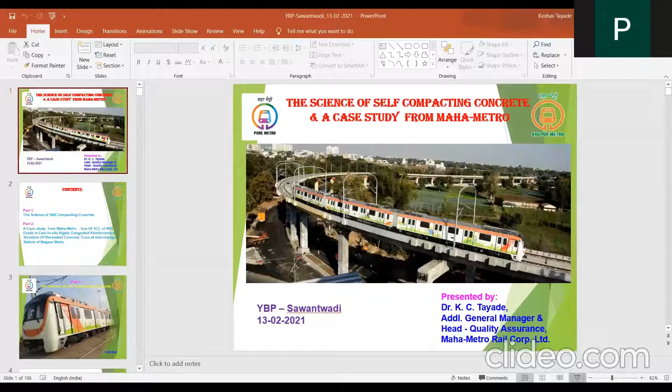I would be presenting before you a topic called self-compacting concrete. Many of you must be knowing it, many of you might have worked with it, but I would be sharing my experience. We have done self-compacting concrete when I was in the Water Resources Department on 3 dams, and then I have done it in Maharashtra Metro Rail Corporation on an interchange station in one of the concrete trusses there. So I would be sharing the screen now, and this is my presentation on the science of self-compacting concrete and a case study from Maharashtra Metro.

There are 2 parts. The complete presentation of 106 slides is divided into 2 parts: the science of self-compacting concrete, and part 2 is a case study from Mahametro on the use of self-compacting concrete of M60 grade. This is also a high grade concrete used in a cast-in-situ, highly congested reinforcement structure of a Vierendeel concrete truss at the interchange station of Nagpur Metro called Sitabuldi station, where there is an interchange of 2 lines. The southwest corridor and the east-west and north-south corridor meet here at this interchange station.

So this is the science. This is the metro train of Nagpur Metro. We'll start with a little introduction.

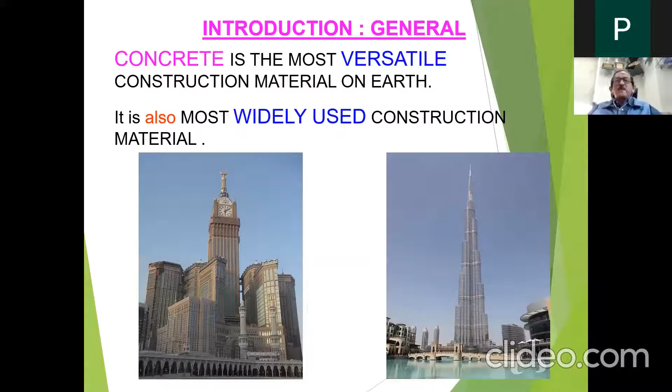As you all know, concrete is the most versatile construction material available on earth, and also the most widely used. However, even though it is widely used, it is least understood. Why? Because we are converting a heterogeneous material into a homogeneous mass, which we require with consistent and homogeneous properties. So we call concrete a panacea for all problems in construction. Whenever concrete is to be done, it has to be done properly, such that the strength and durability criteria are met.

Some beautiful structures of concrete, because we are talking about concrete, and that too self-compacting concrete, which can be cast in many shapes and sizes, almost any shape that can be thought of by the architect. Let us see some structures wherein the shapes would be very important. These are some shapes which are intricate and would require a very high level of precision in working and construction.

Now, a small line from Aspdin. These are the specifications, or we will say the charter by the royal king. He got a patent for cement in 1824, and in it he called it an artificial stone - what we now call cement.

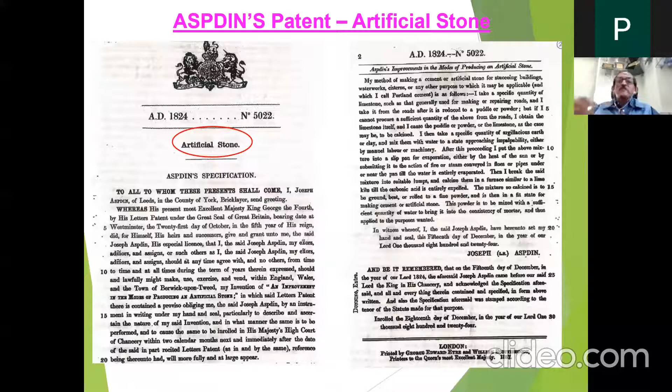Concrete has many definitions, and it is also defined as a flowing stone. That was artificial stone. When we talk about self-compacting concrete, it is a flowing stone, and SCC resembles this in the best way - it is a stone which is flowing, and after some time, when it sets and hardens, it becomes as hard as a stone, or much stronger than many stones.

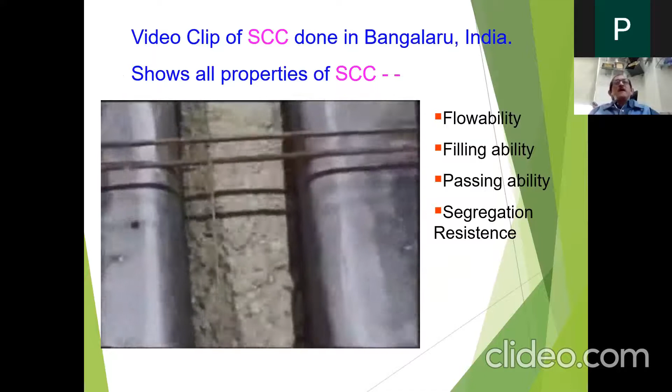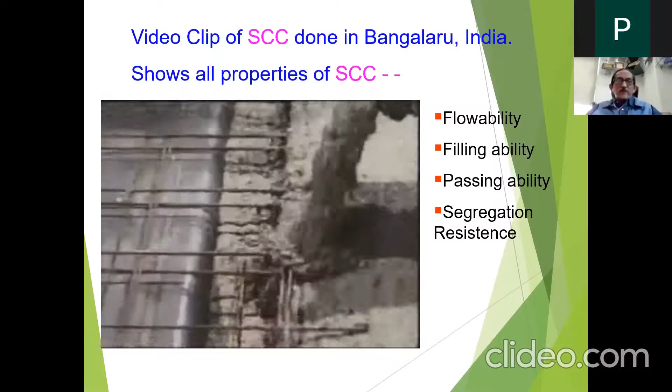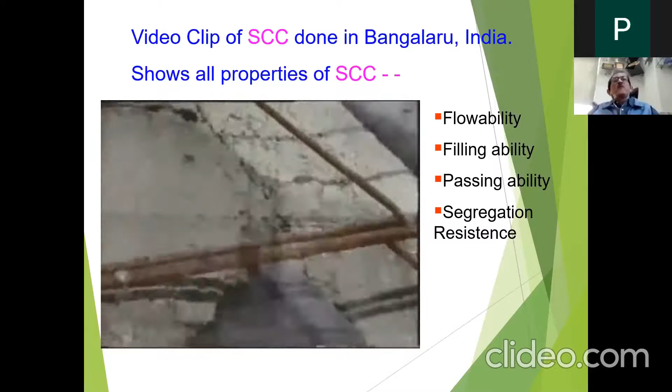This video clip is a very classical case of self-compacting concrete done many years ago in Bangalore, and many such videos are available. I am showing this to highlight the 4 properties required by self-compacting concrete: flowability, filling ability, passing ability, and segregation resistance. Flowability is how the concrete flows without segregation. Filling ability is how the concrete fills the formwork completely. Passing ability is how it passes through reinforcement - even when not very congested, you want concrete that can flow through congested reinforcement - and of course without segregation, meaning it should have segregation resistance.

Am I audible properly? Somebody answer? Yes sir, yes. Okay, no problem. Otherwise after 50 slides people would say it was not properly audible - that should not happen.

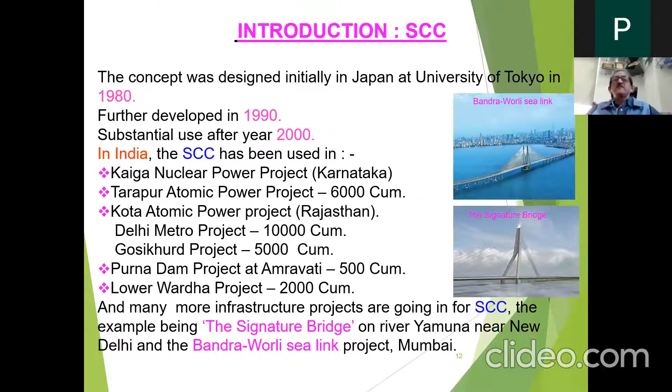In the Indian scenario, a few projects have used SCC in recent years: bridges, atomic power plants, dams, metros, and monorails. The adaptability or shift to self-compacting concrete is still limited, because people think doing SCC is a very intricate job.

It's not like that. Once the concrete is properly designed by a concrete technologist, what the site people need is only a very properly designed formwork. If the formwork is proper without any leakages, and the mix designed by a concrete technologist is proper, then SCC would be the best option. I would also say that self-compacting concrete is the future of concrete. Fiber reinforced concrete and self-compacting concrete would be, or should be, the future of concrete, because of the many advantages of self-compacting concrete.

Self-compacting concrete has been defined by very many sources, and if you go to a website you would find numerous definitions. But the three most important, or most suited to us, are the EFNARC specification, what is defined by Khayat, and what is defined by the Japan Concrete Institute. There is also the Korean Concrete Institute. So what is SCC as defined by EFNARC?

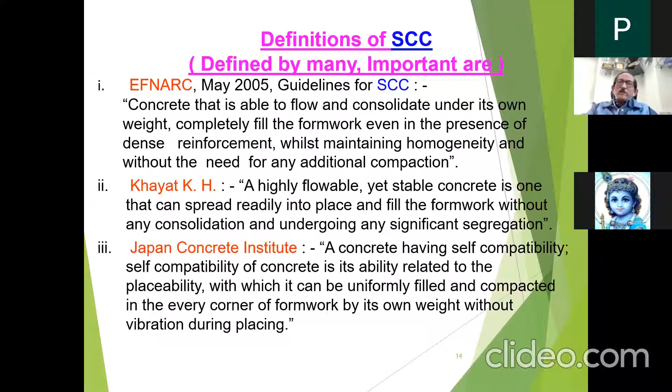The Japan Concrete Institute defines a concrete having self-compactability as the ability related to placeability with which it can be uniformly filled and compacted in every corner of the formwork by its own weight, without vibration during placing. This definition is also very apt in explaining the various properties of self-compacting concrete.

So self-compacting concrete, in short, is a highly workable concrete with slump in the range of 650 to 800, which can flow through densely reinforced and complex structural elements, as you will see in the lecture ahead. It has enough cohesion to adequately fill all the voids without segregation, without bleeding, without separation of material, and without the need for vibration or any mechanical consolidation or outside energy. It is useful wherever placement is difficult, such as heavily reinforced members or complicated formworks, and where vibration is difficult.

So this would be the best option. After going through this lecture, you may also try or take up projects in self-compacting concrete, and I would always be glad to be associated with them and tell you the minor things about it, and where people normally would go wrong or find difficulty. The honorable professors and lecturers listening to this lecture can always take up small projects in self-compacting concrete. What you need is only, first, the will and the attitude, and secondly, the 3-4 instruments for checking, which can be easily fabricated in your workshops.

So SCC is considered a preferred option due to its well-known properties of flowability, passability, and compactability. We will again and again talk on these properties, because they should never be sacrificed when designing self-compacting concrete. Many people would say their concrete is self-compacting only because it has a slump of 300 or 400. I would say that is not self-compacting concrete, it is a rheodynamic concrete or a very high flow concrete, wherein there would be a possibility of segregation and compactability problems, because it is not designed as self-compacting concrete.

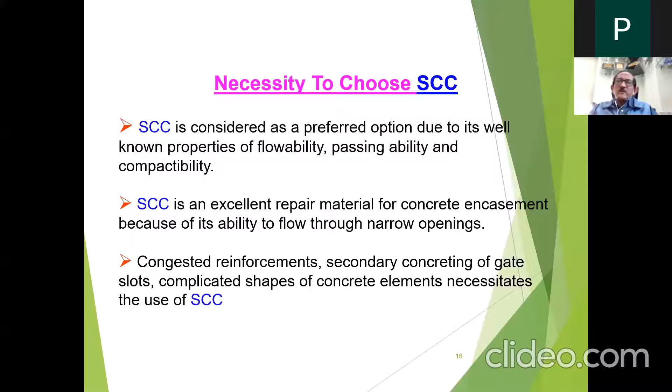SCC is an excellent repair material for congested reinforcement, secondary concreting of gate slots, complicated shapes, and everywhere a man or an engineer can think of. These are situations where self-compacting concrete is preferred, flowing through narrow openings and through secondary concreting of gate slots.

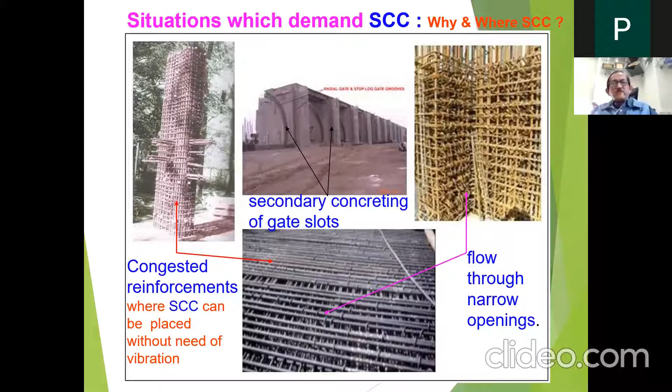The second photograph is from the Lower Wardha project, wherein the gate slots, the curved radial gate slots you are seeing, are secondary concreting filled with self-compacting concrete. The bottom photograph is one of the rafts in metro projects, wherein there is heavy congestion and we need to go for self-compacting concrete.

These are some examples. This is a pier of a flyover. The second photograph is a pier of one of the metro piers in Nagpur, and the same type of piers are there in Pune also. This shows congestion, and this is the Mumbai Metro monorail project, wherein they have gone in for complete self-compacting concrete for the piers also.

These are the radial gates and the gate slots where concreting was done, and the concreting needs to be done when the gates are in position. It becomes very difficult because from one side there would be formwork, and on the inside there would be inserts to hold the gates and the plate for gate sliding. So it's a very congested place wherein self-compacting concrete would be a better option.

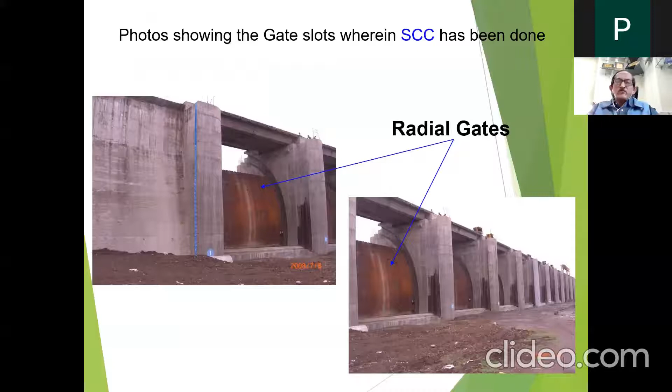This is the Gosikhurd project, one of the biggest projects of national importance. This is the Lower Wardha project, wherein all the gate slots have been concreted with self-compacting concrete.

There are many advantages, some of which I have enumerated here. It can completely fill the formwork, can be placed and compacted by its self-weight without any vibration efforts, and offers a rapid rate of concrete placement. This is another big advantage, because normal vibrated concrete that would take 8 hours to place, the same concrete with self-compacting can be put in place in just 2 hours.

So there would be 75% time savings. In just 25% of the time, we can place self-compacting concrete. There's also reduction of number of joints, and use of fly ash on a very big scale because you require high paste content, so fly ash use is mandatory. If you are not getting fly ash, you can go for slag, but fly ash is a better option because it is eco-friendly also.

Then SCC enables reduction in noise, because if you are residing near metro works, and when concreting goes on at night with vibrators, it makes a lot of noise—this is a first-hand experience to many. Now imagine with no vibration, how quietly the concrete can be done.

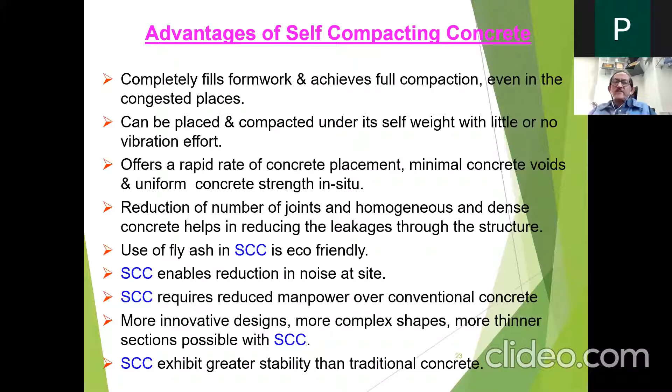When SCC is used, internal bleeding is reduced because you have a very good rheology of the concrete. The denser microstructure of the ITZ, the interfacial transition zone, in SCC may contribute to lower plastic settlement, higher bond between steel and concrete matrix, lower permeability to oxygen, and lower chloride diffusion coefficient.

So even with the oxygen permeability test, which is coming in IS 456 as an amendment, you will find that SCC has lower oxygen permeability. In RCPT also, or chloride migration as per Nordtest 492, it would show better results.

Then SCC allows rapid pumping, as I have told you, and has improved aesthetics of the final product. Whatever SCC I have done, I have observed that the finishes of self-compacting concrete, due to the presence of fly ash, become so smooth that it resembles a concrete like marble.

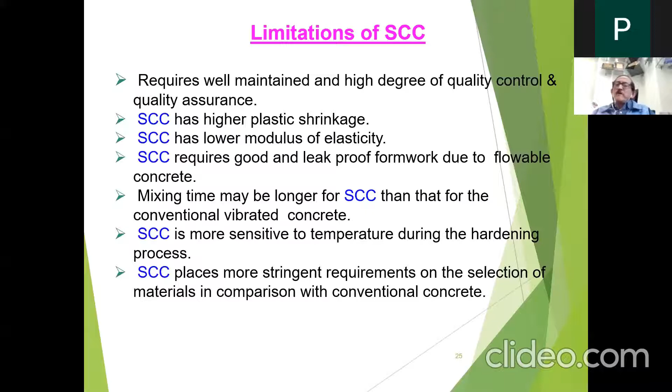To understand self-compacting concrete, it is very essential that the rheology be understood, because you are playing with the rheology of concrete. You are making use of the rheology of concrete, and this complete science of rheology, in preparation of self-compacting concrete.

Now, rheology may be defined as the science of the deformation and flow of material, and is concerned with the relationship between stress, strain, rate of strain, and time.

So all these things together, there is a relationship. The ratio of shear stress to shear rate is not constant for concrete. The shear stress initially required for shearing the concrete would be very less when the concrete is just prepared. But as time passes and the concrete starts to harden, the shear stress required would be more and more, and at one stage when it solidifies, it would be far greater. So this ratio is different.

For fresh concrete, the flow equation is expressed by Bingham's equation: tau equals tau0 plus mu into gamma. The rate of shear and the shear stress relationship is defined by the slope mu, and there is a fixed yield stress. The yield stress is fixed because when you take the slump, you see the concrete in a heap, and to displace it you require some initial force, that is the value of yield stress tau0, after which the concrete will go on flowing.

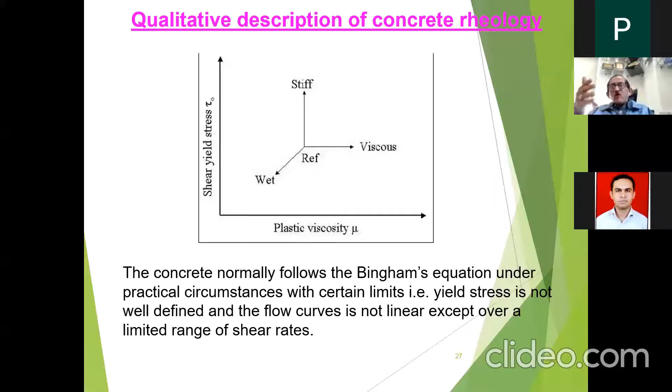This understanding has to be applied when preparing self-compacting concrete, because stiffness, wetness, and flowability will all be considered while designing it. The rheology of fresh concrete, like workability, includes parameters of stability. These three parameters are what we call SMC: stability, mobility, and compactability. I have written stability, compactability, and movability or flowability. All three parameters encompass six sub-parameters in turn.

The stability of the concrete depends on whether it has segregation resistance, whether bleeding is present or not. If bleeding is present, the concrete is not stable. Compactability depends on relative density and how easily it can be compacted into the formwork being used. Mobility depends on internal friction, cohesion, and viscosity.

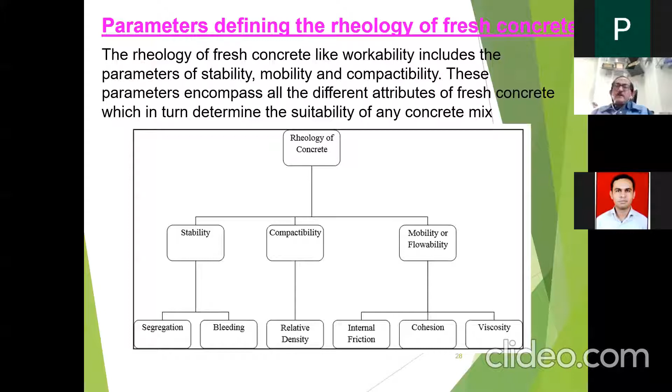All these parameters are played with when self-compacting concrete is designed, by addition of paste and by addition of viscosity modifying agents. We play with the internal friction, adding superplasticizer, or hyperplasticizer, so that internal friction is reduced. We use proper mix design and properly graded material, and control the water-powder ratio, so that bleeding and segregation are avoided. The mix should be cohesive but not too cohesive, otherwise it hampers workability, and it should be viscous enough so that it can be molded into shape.

Specifications would change as per the size and shape of the member and its intended use.

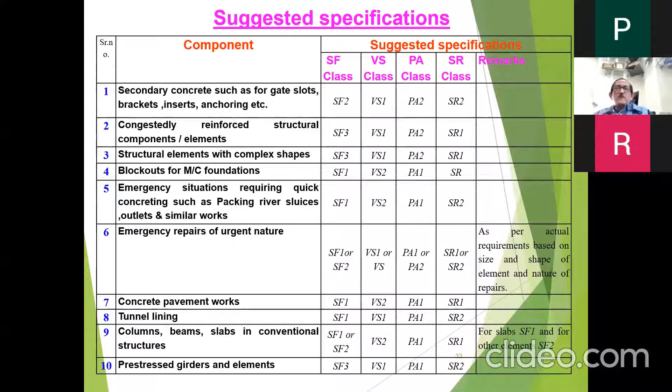This is the flow chart for the design of self-compacting concrete. You have to have flowability and stability, and these are covered and intermixed with limitation of coarse aggregate, usage of superplasticizer, reduction of water powder ratio, usage of viscosity modifying agent, and usage of higher powder ratio. This would in turn affect stability and flowability, which are intermingled. The parameters are intermingled, and they would affect the self-compacting concrete.

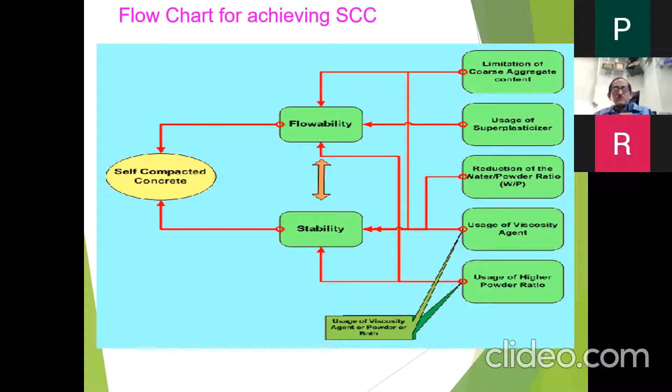So we need to design a self-compacting concrete which will be a trade-off, or a compromise, between flowability and stability. At the same time, we want mobility and compactability also. So all these things have to be taken together, and the design has to be done accordingly.

Materials for self-compacting concrete include lower coarse aggregate content, increased paste content, lower water powder ratio, increased use of superplasticizer or hyperplasticizer, meaning high range superplasticizer. So there would be mid PCs, high PCs, high range PCs, and addition of viscosity modifying agents.

Viscosity modifying agents are admixtures that modify the cohesion. They affect the rheological properties, modifying the rheology. They are used to reduce segregation, to reduce washout in underwater concrete, reduce friction and pressure in pumped concrete, compensate for poor aggregate grading—especially a lack of fines in the sand—reduce powder content in self-compacting concrete, reduce bleeding, and improve green strength in semi-dry concrete. All these give viscosity modifying agents their place in self-compacting concrete.

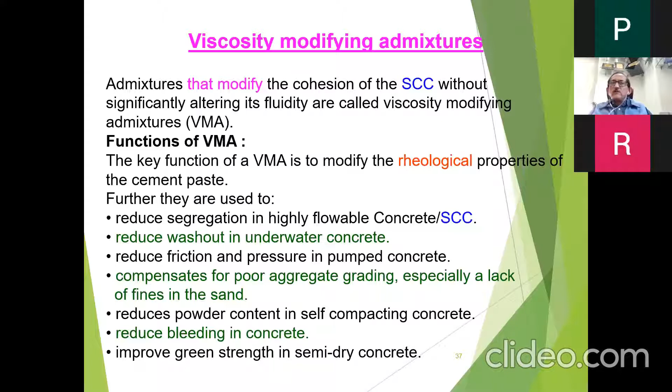Even though people say we can design self-compacting concrete without VMA, from my experience and reading, it would always be good to go for self-compacting concrete that uses both powder and viscosity modifying admixtures. For research work, you can design an SCC using only powder without VMA. But when the concrete mix is going to be used on field, for a public building or structure where thousands of people would use it, it is always better to use both viscosity modifying agents and powder to design the self-compacting concrete.

There are many approaches to mix proportioning. In the first category, the basic steps are determining the quantity of coarse aggregate and then deriving the approximate quality of mortar. In the second category, it's reversed: you first design a suitable mortar and then add the quantity of coarse aggregate.

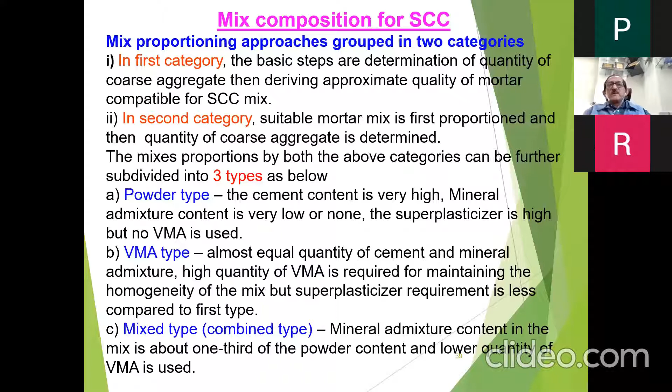Mixes are designed in three types. One is the powder type, where only powder content is high—powder meaning not only cement but mineral admixtures taken together. Then the VMA type, where only VMA is used but powder is not. And the mixed type, the combined type, where mineral admixture content is about one-third of the powder, with a lower quantity of VMA also used. This combined type, using both VMA and powder, would be the best type of self-compacting concrete for field use.

The basic mix proportioning methods fall into 4 categories: empirical methods, rheology-based methods, particle packing models—of which there are two, the discrete model and the continuous model—and statistical methods.

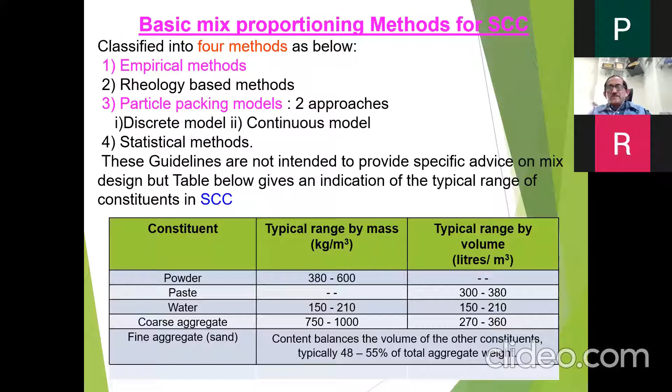These guidelines are not intended to provide specific advice, but the table below gives an indication of the typical range of constituents. When you start, EFNARC gives us a table showing what the powder range should be, how much paste or volume there should be, how much water should be, and so on.

A word of caution: SCC is less tolerant to changes in constituent characteristics compared to normal concrete. So whatever constituents we use for mix design must be the same on site. It's not acceptable to have different components during design and then have different components during production at the batching plant, because any change in constituent components changes the characteristics, and SCC is less tolerant to such changes.

Whenever I say less or more tolerant, it's always with respect to normal vibrated concrete. So all aspects of production and placing must be carefully supervised. Production of self-compacting concrete should be carried out in plants where equipment, operation, and materials are suitably controlled under a quality assurance scheme.

The formwork needs special attention. Formwork design, support, and fixing systems should assume that full hydrostatic pressure is applied to the formwork. Since the density of green concrete is approximately 2.4 to 2.5 times that of water, we have to account for 2.5 times the hydrostatic pressure that would be applied by water alone.

Experience shows that SCC does not forgive any shortcuts. If you take any shortcuts or make assumptions, you will not be forgiven and you will have to pay for your mistakes. So this is a word of caution before we proceed to transportation and placement of self-compacting concrete.

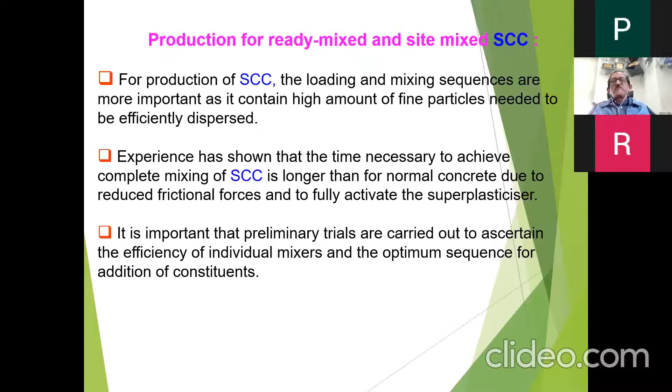After production, the concrete has to be assessed for Visual Stability Index, VSI. A value of 0 indicates the concrete is highly stable. A value of 1 means stable with slight bleeding at the edges. A value of 2 means unstable with bleeding.

Transportation and delivery can be done either by truck, truck agitator, or transit mixer. The main advantage is increased speed of placing. But this advantage must be managed carefully, because we need the formwork ready beforehand, and we need people available to manage the concrete arriving at greater speed, which the pump then places into the site.

It is essential that the production capacity of the plant, journey time, and placing capacity at site are all well balanced, and that is where planning comes into the picture. You have to plan beforehand, and you have to plan in detail.

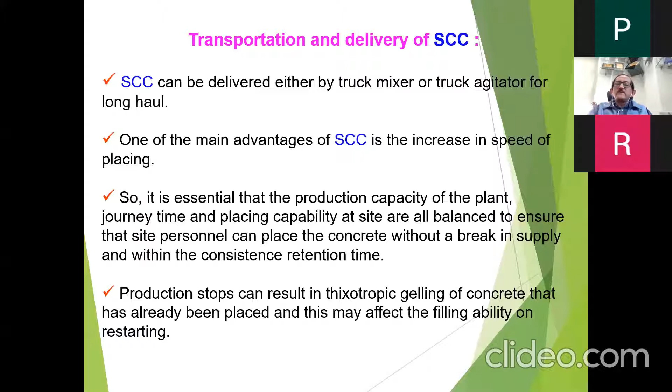The site requirements prior to delivery shall include that the site can place the concrete at agreed delivery rates, that acceptance procedures are agreed, personnel are trained, and formwork is leak proof.

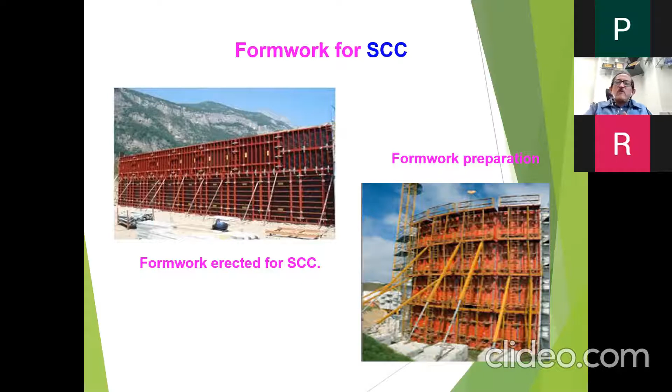So leakage proof formwork has to be prepared. The formwork pressure, I already told you about the formwork design, and these are some of the formworks erected, a very high level of formwork. In Metro also we go in for very good formwork. You might have seen in Pune or Nagpur, or in Bombay also, for that matter. Any metro would have very good formwork for piers and pier caps. The same type of heavy, leak-proof formwork we have to prepare.

This is a formwork where we can pump the concrete bottom up. So this is another advantage. Normally the concrete would have to be placed from top down by putting the chute or the pump delivery pipeline inside the concrete, or the hose pipe, which has to be pulled up as the concrete gets filled up. But here, because you are filling a liquid in the container, you can fill it from the bottom. But when putting it from the bottom and it rises up the formwork, you have to consider the pumping pressures also.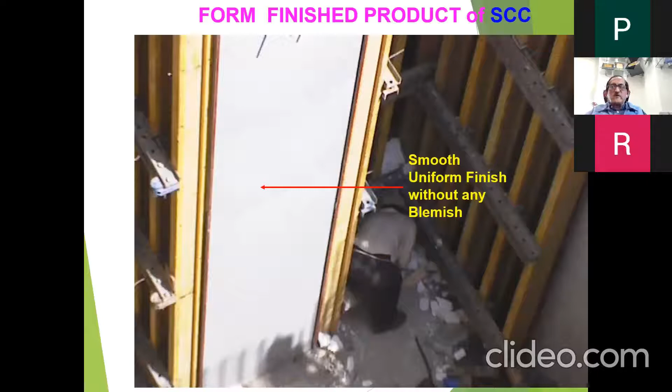This is a photograph showing a smooth finish, as I told you, without any blemishes. And this is the Gosikhurd project photograph, wherein you can see it's a very high glossy finish, a very good finish.

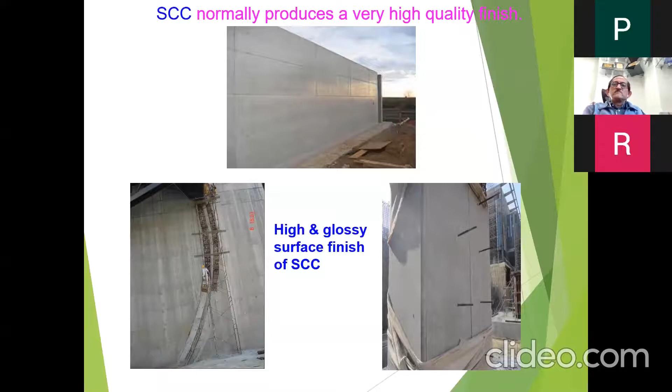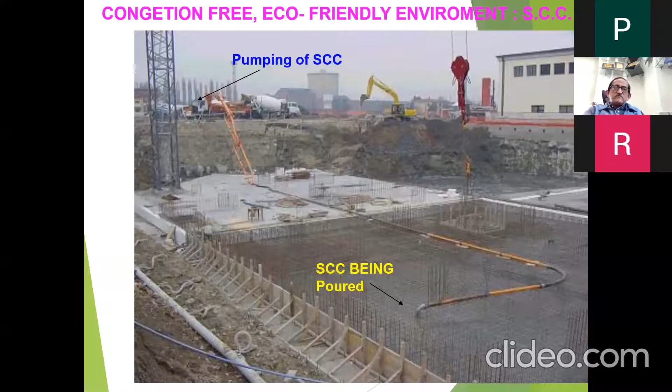Pumping is the most common suitable method. You can see this is self-compacting concrete, and you can see how watery it is, with a high slump.

There are 4 characteristics and many test methods. One is flowability or filling ability, using slump flow; then viscosity, measured by T500, V-funnel, or Orimet test methods; passing ability, measured by L-box, U-box, J-ring; and segregation resistance.

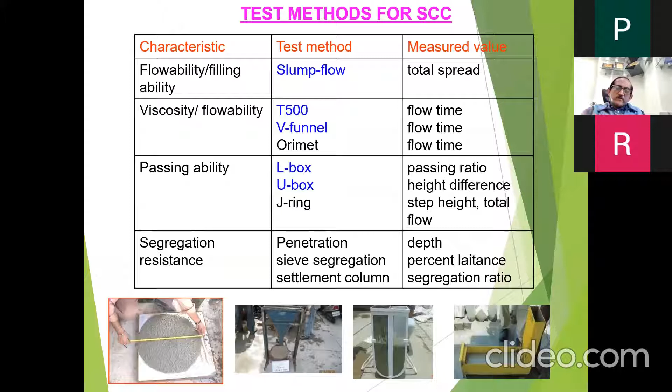We can look at some of the methods - this is the flow test method. An Abrams cone is placed, then lifted, and the slump is measured. The total flow and the flow at 500mm diameter are measured. The time which the flow requires to pass the 500mm diameter, called T500 or T50, is the time the concrete takes to cross that line, and the total flow is the final flow. The time required to spread can also be measured.

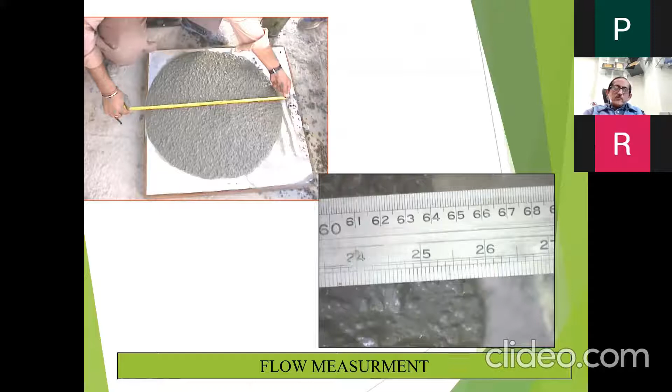So this is us measuring it, and this is the actual measurement. You can see the photograph here - it is 65, and normally 660. So the flow slump is 660 mm.

This is a small video I would be starting. Can you hear the music?

Yes, sir. Yeah. Yes, sir. Yeah.

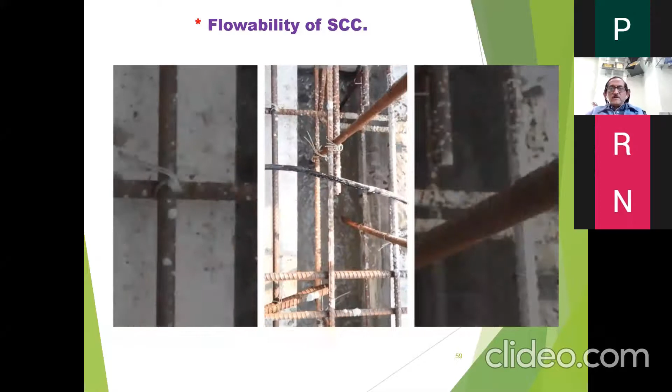Here you can see the concrete moving, how beautifully, without any compaction or external vibration efforts, it is moving.

This is the V funnel test, wherein there is a funnel. These equipments, as I told you, can be fabricated in your college workshops and used; the specifications and shapes are given everywhere. You have to fill this, then this hinged trap door is to be opened, and the time required for it to become completely drawn out is noted. So the time taken for the flow passing through the apparatus is measured.

In the L box, there is a trap door, and you have to fill this, and then the flow takes place here. If it is an ideal liquid, the height here and the height here would be the same. But when concrete is there, it should be between 0.8 to 1. So when you go towards 1, it will be a good flow, and H2 upon H1 is the ratio, the blocking ratio, they say.

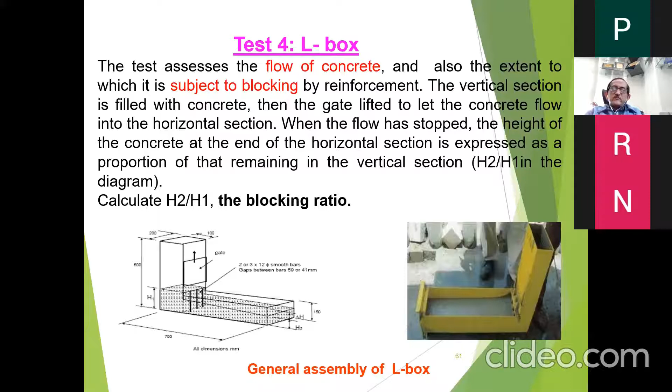Then this is the L box. You have to fill it from one side. Many of you must have worked on this, or might have seen it, but here I am just refreshing your knowledge that these are the things which need to be done, and these are the properties, the typical ranges.

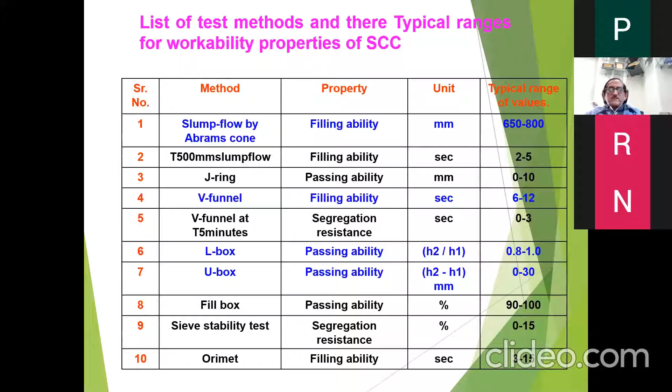The T500 should be 2 to 5 seconds. The V funnel should be 6 to 12 seconds, and L box should be 0.8 to 1, and U box should be 0 to 30 mm. So all these tests which have been shown are shown in blue color.

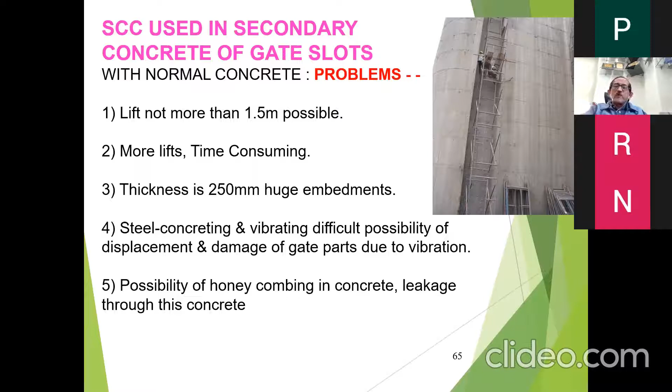Thickness is 250, huge embedments. This was the case in Gosikhurd and all the 3 dams where gate slot concreting, secondary concreting, was being done. Honeycombing and leakages through this concrete take place through this secondary concrete. So we went for self-compacting concrete, where lifts up to 6 to 9 meters were possible, with no vibration, no honeycombing, and a total SCC executed of 2000 m.

Details of SCC executed: 33 numbers of spillway and emergency gate slots of 2896 meters, with lifts of 6 to 9 meters. So if we had gone for 1.5 meter height, the number of lifts would have been more, and the time taken would have been more, because every time the lift has to be executed, the shuttering would be there. Here we can put a shutter of 6 to 9 meters at one go and then fill the concrete inside.

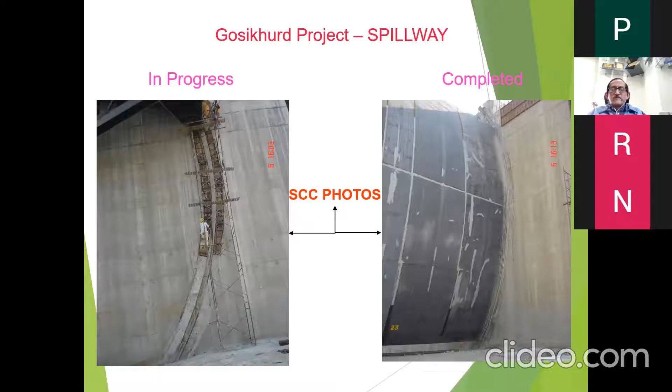This is the shutter. You can see this height. This is a very big gate of 70 feet height, and you can see that we are doing it in 1, 2, and there would be a remaining portion. So it was done at a great height, lifts of 6 meters.

Lower Wardha also, total blockout plan 31, and 1188 lifts would have been required for conventional concreting, which got reduced to 1/3 because we have gone for 4.5, 6 meter and more lift heights. So it has reduced drastically.

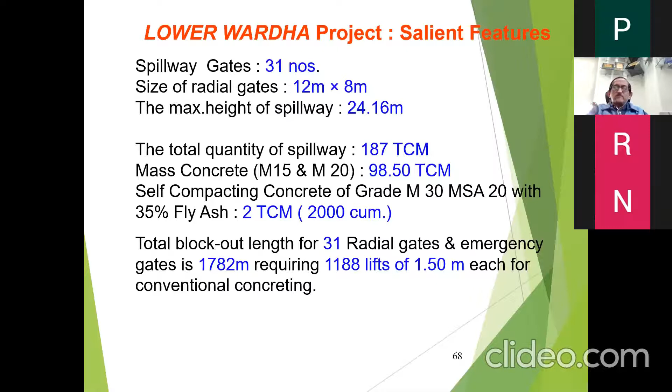This is one of the, as I told you, a handbook, WRD handbook, chapter number 3, self-compacting concrete. I was the author of this chapter. April 2019 it was released, however the chapter was long written in 2014-15. As per government procedures, it went through all the offices, there were comments, and it was given to many other WRDs of other departments and state governments, and their comments were also there. All were compiled and complied with, and then this chapter was taken out. This is available in the government press, in Bombay and in Nagpur also.

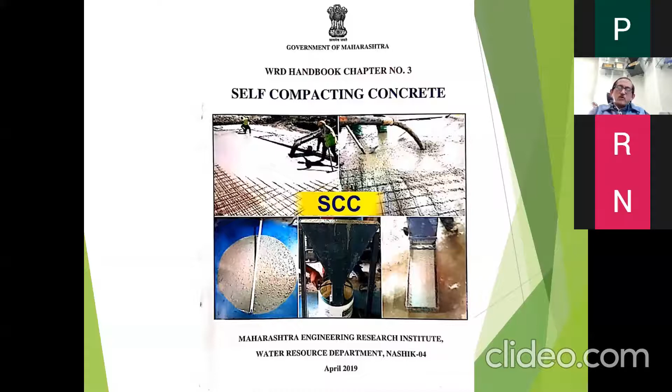Now we'll go to a case study of Mahametro, use of self-compacting concrete in cast in situ highly congested reinforcement. How much time do I have? You can continue, no problem.

This is the viaduct, and what is a Vierendeel truss? A Vierendeel truss, or rigid frame truss, was first introduced by Professor Arthur Vierendeel in Belgium at the beginning of the 20th century, so it is more than 125 years old. The Vierendeel truss is a structure where the members are not triangulated but form rectangular openings, and the members of the truss are joined rigidly together, with each member required to transmit bending, shear, and direct stresses.

The advantages of the Vierendeel truss are simplicity, simple detailing, less weight than a conventional truss, time saving, and resulting cheaper casting cost than a conventional truss. Due to heavy congested reinforcement steel in the structure, normal concrete pouring in formwork and layer-wise compaction using a needle vibrator was found practically difficult, so self-compacting concrete was designed and implemented.

Why we went in for self-compacting concrete was because of two problems we foresaw. One was the heavy congestion, which I used to say would require self-compacting concrete. And when the site people saw that the beams were 1.5 meters deep, it would be very difficult to compact the concrete when poured, because there are slender sections and deeper sections, so it would be difficult. So we shifted to this type of concreting.

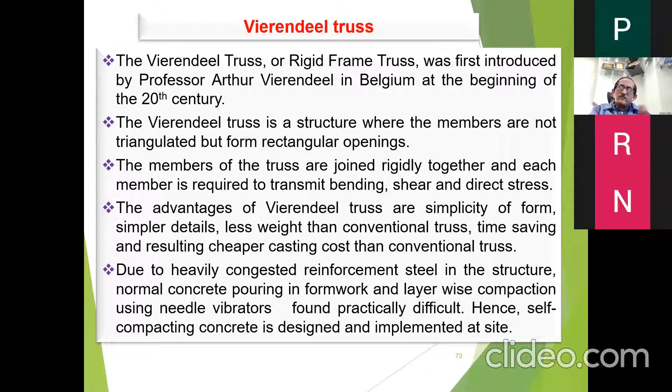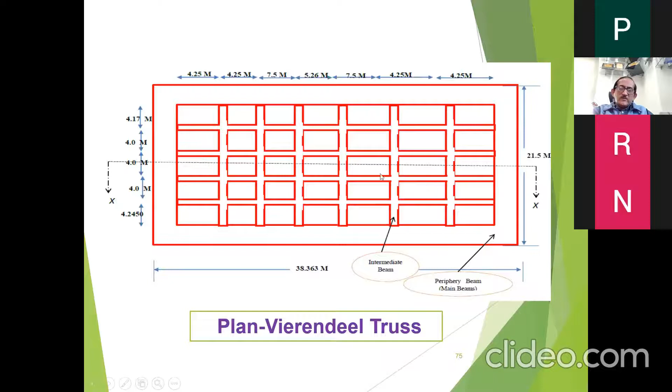The spans were 21.5 meters by 38 meters. So the Vierendeel truss had main beams of 38 meters, with 4 columns or piers, and the structure was supported by 4 main peripheral beams with intermediate beams. These are the peripheral beams, 1, 2, 3, 4 along the periphery, and these are the intermediate beams. The section was like this, with the pier going up, the main peripheral beam, and then beams in between.

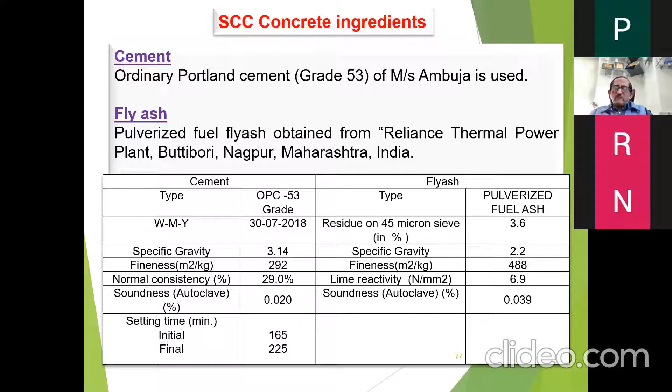Ordinary cement was used. The fly ash used was from Reliance Thermal Power Plant near Nagpur Buttibori. The cement was OPC 53 grade, and the fly ash had a fineness of 488 Blaine, or meter square per kg, while the fineness of cement was 292. The fly ash requirement as per code should be more than 300, and we used a very good fine fly ash.

These are the loss on ignition and all the other parameters we tested. We did a lot of extensive testing here because we were certain that this case study needed to be told to many people, like you, the professors and lecturers, and also many professionals would be interested in knowing about the case study. So we did all the testing possible.

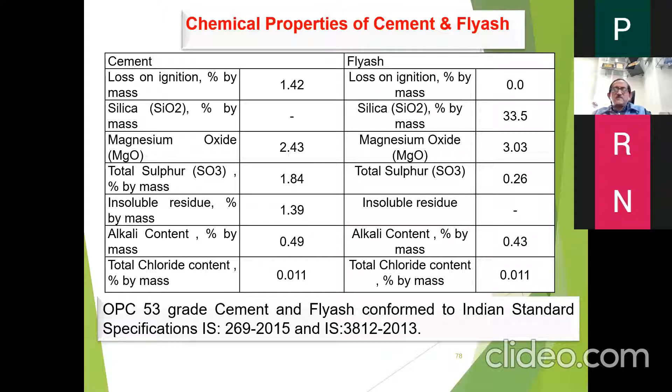A polycarboxylate ether-based high-range water-reducing brand, Fosroc, was used. The viscosity modifying agent was Oramix V100, and Auramix 400 was the hyperplasticizer or high-range superplasticizer. These are the specifications with pH and dry material content as required per Indian Standard 9103.

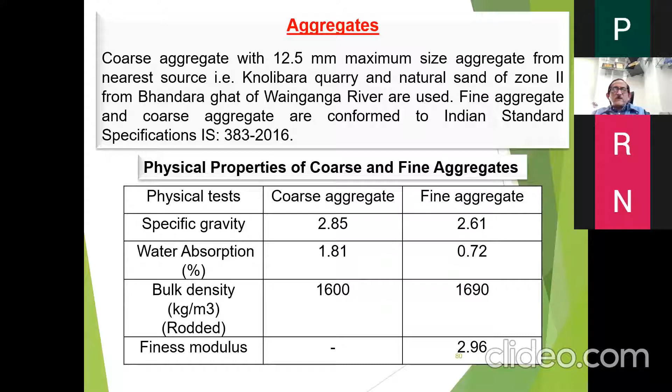Coarse aggregate was 12.5 maximum size. As I told you, we did 5 mix designs, and TR5, trial number 5, was finally adopted.

The cement content was 450 kg, because since this was M60 grade concrete, 450 is the limit as per Indian Standard 456, which puts a higher limit of 450 kg pure cement, and then you can add fly ash. So fly ash added was 170 kg, taking the total powder to 620 kg.

With a water-powder ratio of 0.28 to 0.3, the water content was 174 kg, with high range water reducer of 4 kg per cubic meter, and VMA 1 kg per cubic meter.

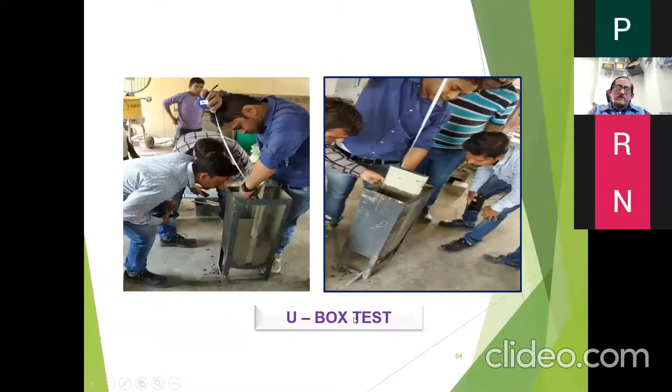Temperature taking, slump flow test, and sieve segregation U-box tests were done. There's also a V-funnel test, with some videos. If they are there, I'll show you afterwards.

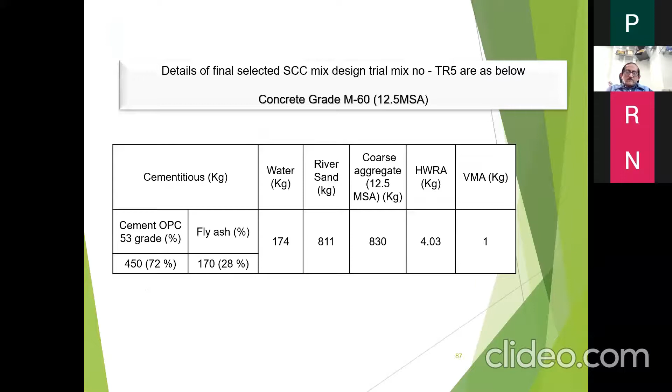Fly ash was 28%, cement 72%, with coarse aggregate and river sand. These are the values for the mix design TR5.

And this is the test. However, the video would not be professional quality, just a minute, I will go back. The video would not be by a professional photographer, since it was taken by a quality control engineer, but no problem, we can always see the video.

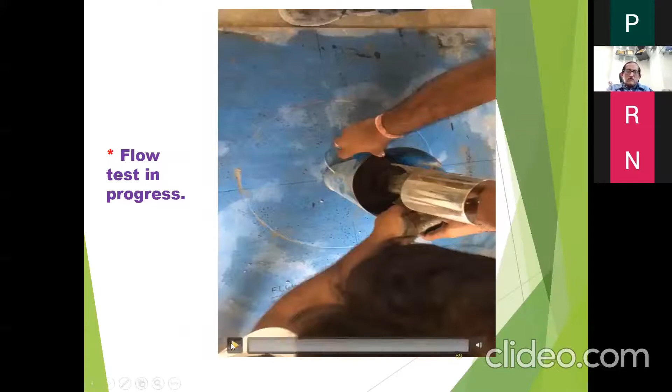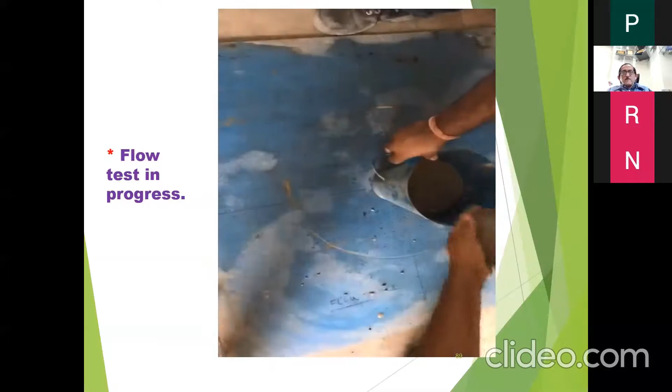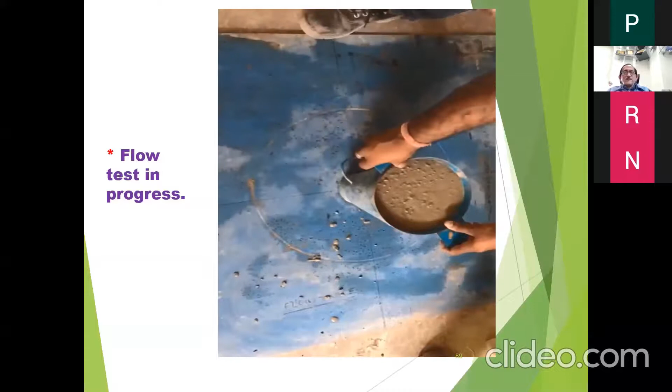They were doing the test in the laboratory. This is the actual uncut video. There would be many questions from people because they may not be very conversant with this type of methodology or concrete.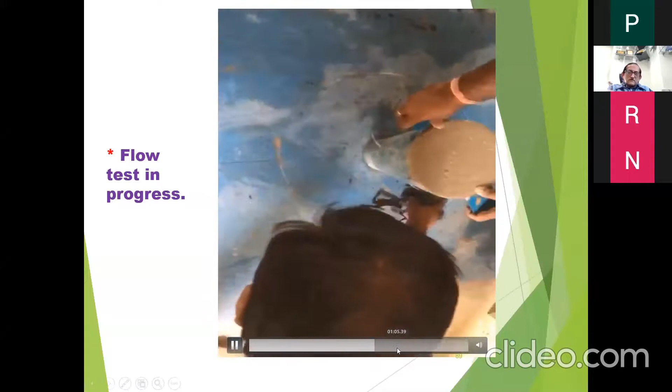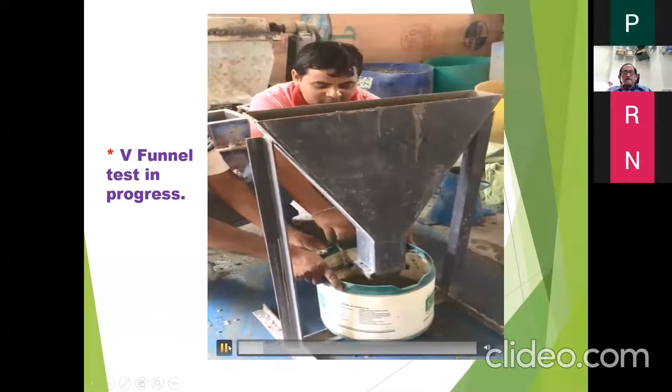You can see the flow on the first go. This is really creditable. This is the view. It came out completely in 6 seconds, yes.

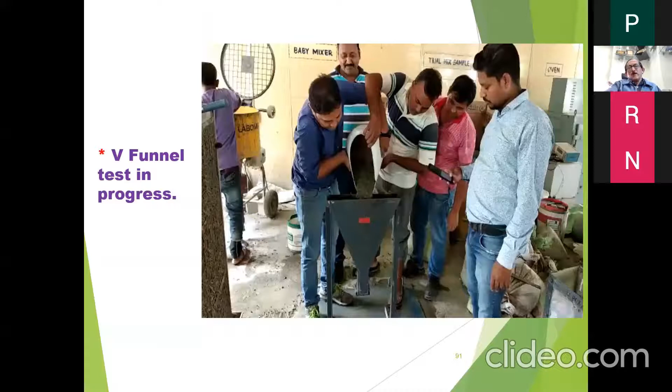There were 3 layers of Vierendeel truss, and each layer contained approximately 550 cubic meters of concrete along with 1100 MT of reinforcement. You can see the reinforcement here, it is too congested. The size of the major Vierendeel beam was 38.3 meters with 2.8 meter depth, highly reinforced.

The dense reinforcement was in the range of 210 kg per cubic meter. Normally, reinforcement in normal structures would be in the range of 80 to 120 kg, but here, due to congestion, the ratio went to 210 kg per cubic meter of concrete.

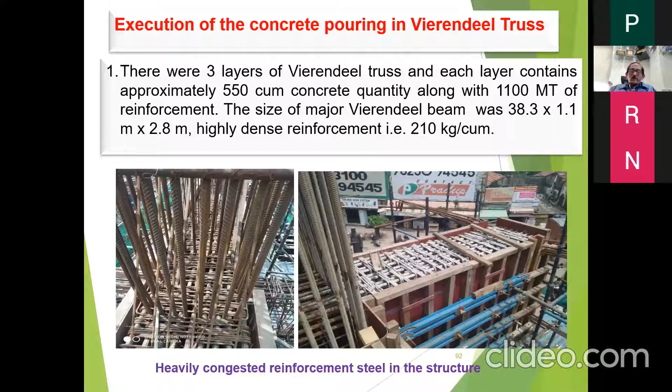The peripheral length of longitudinal and transverse beams was calculated, with concreting done in 30 centimeter layers, quantity 39.5 cubic meters. 2 concrete pump boom placers were deployed, with locations of the first and second boom placers, and the concrete flowed in this and this direction.

There were some intermediate beams also. The rate of concrete pumping of the boom placer was kept at 15 cubic meters during concreting. The SCC was designed for a retention time of 3 hours, hence the layer of concrete for the complete periphery could be easily placed.

That time was calculated so that by the time we reach the same location, it should be within a reasonable time, definitely less than 3 hours retention time. This is the site photograph.

You can see the 2 boom placers putting the concrete at one place, and the concrete is moving. These are the peripheral beams, and these are the intermediate beams. This is the first level of the Vierendeel truss.

Batching plant 2 numbers, capacity 30 cubic meters. Boom placer 2 numbers, capacity 30 cubic meter per hour. Stationary pump 1 as a standby, because if there is some failure of the boom placer, our concrete should not stop.

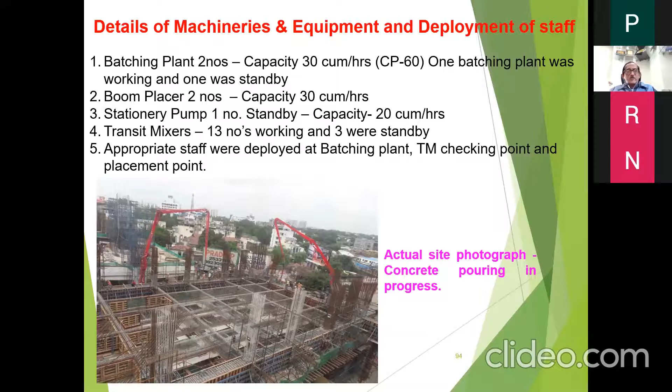Transit mixer 13 numbers, 3 were standby, with appropriate staff at batching plant, TM checking point and placement point, because the TM which brings the concrete has to be checked thoroughly and sealed, otherwise people should not add water or something. So there was a transit mixer checking point and placement point. Engineers were deployed to foresee how the concrete is being put.

Contingency plans were also prepared in advance for all preventive actions to avoid breakdowns. Standby machineries and equipment: batching plant 1 number was standby as there were two, so one could easily be said as standby. Transit mixers, actually three, but they say they had five, two were already standing so we did not count it, but it would be said as five because those two could also be deployed in emergency. Stationary pump 1 number was standby, and in case of any emergency, concrete pouring work could be stopped using this arrangement.

Wooden battens could be inserted vertically to make a barrier for further concrete flow at 1/3 length of the beam, and also at 1/6 length of the beam. These positions were taken from the structural engineer, in case we were to stop the concrete for any unforeseen event, which we were prepared for. By inserting wooden battens vertically, so the joint has to be vertical so that thixotropic gelling would not occur. But if the concrete flows to a distance with a small thin layer, then it would have been difficult.

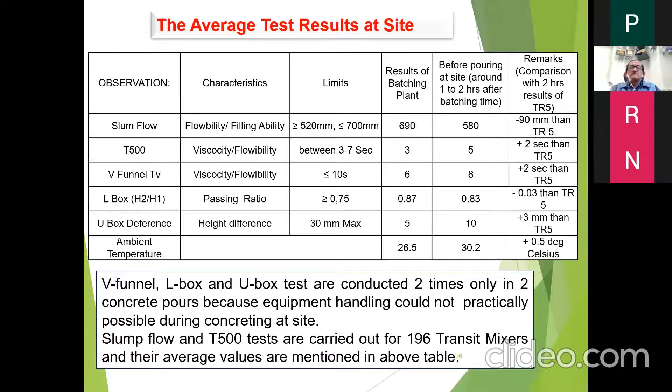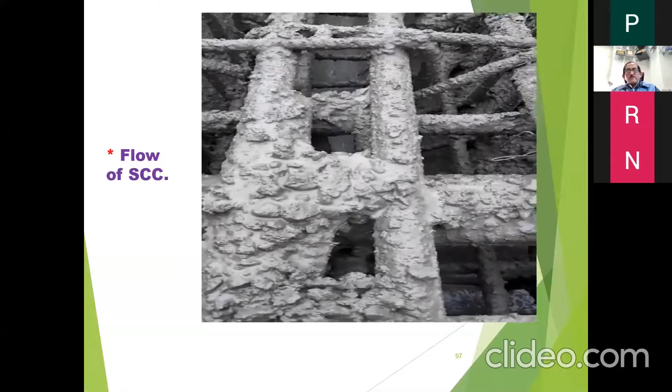This is the flow of our concrete. You can see this is shot by a handheld mobile camera. You can see the flow, and it is going at 90 degrees also. This is a main beam, and this is a beam, these are the jointing beams or secondary beams. So you can see the concrete flowing as well as going at 90 degrees, so the beauty of that.

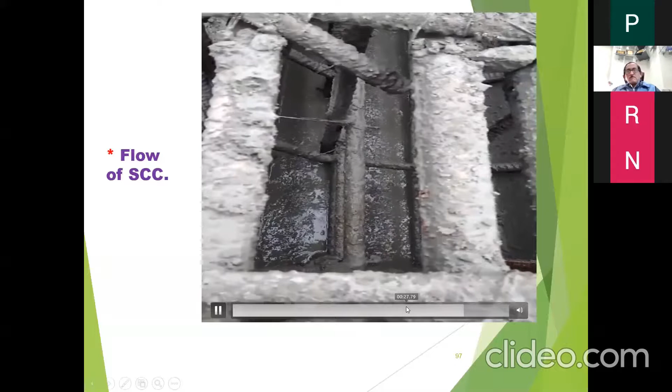This is the actual site photo video. Another video.

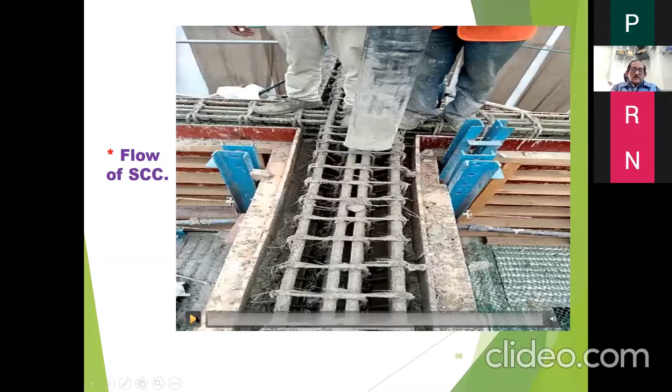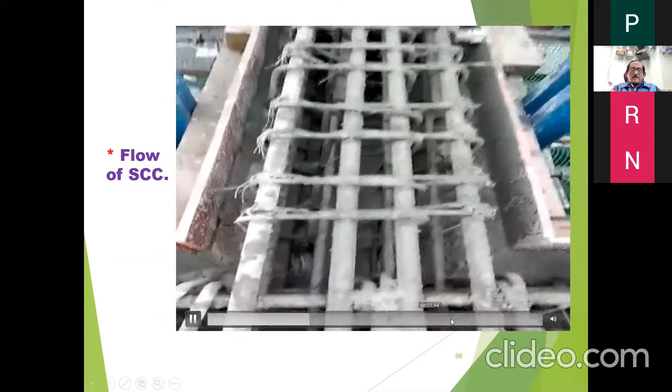The contractor was told not to move the pipe because they are in a habit of moving it, which is not required, but just so that the flow should be higher, they were doing it. Afterwards, they were told not to move the hose pipe and keep it stationary at one location.

Then all other tests such as rapid chloride penetration test, permeability test, flexure testing, split tensile test, drying shrinkage, moisture movement, chloride content and sulfate content were also done, and the actual results were obtained in Bureau Veritas India Limited laboratory.

And we got a very good value of 1252 coulombs RCPT, which is in a low category, then permeability of 8 mm against the required 25 mm. Flexural strength also we got good, more than required. Split tensile, drying shrinkage also very less. Moisture movement, chloride content 0.2% against 0.5%, and sulfate content.

So all the values were very good, and in general the cube compressive strength was also evaluated at 7 days, 28 days and 56 days, just to see how the strength is increasing with time, because we used a lot of secondary cementitious material, that is fly ash, which we are required to use. That's why we assessed how much strength was gained at 56 days. The number of samples tested were 9 at 7 days, 34 at 28 days, and 9 at 56 days.

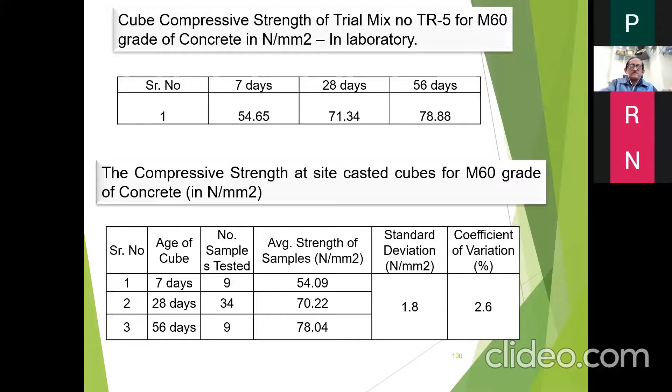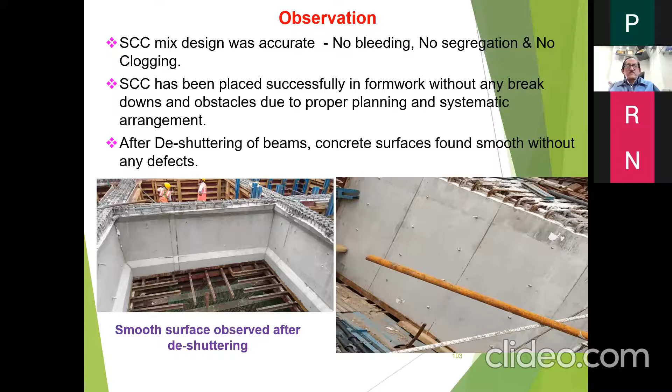After the formwork is removed, you can see the smooth surface after deshuttering, and these surfaces are still visible today, now painted but not plastered. So it is form finish concrete. The main beam depth here is 2.8 meters, this is 1.5 meters. You can see the finishes and the haunch portion. Normally honeycombing would occur near the haunch portion where there are negative slopes, a negative change in direction of the shutter, but after deshuttering, the concrete surface was found smooth without any defects.

And these are the conclusions. VMA plays a crucial role, as I have mentioned, for maintaining cohesiveness and avoiding segregation; excellent quality control and good construction practices are required. Designed and leak-proof formwork is necessary. Without VMA, self-compacting concrete can be designed, but strict control during production is required, as HRWRA is very sensitive in concrete. Minor changes in doses or moisture correction will easily affect the concrete mix.

Recommended water-powder ratio is between 0.8 to 1.1, but based on field trials and parameters of filling ability, passing ability, and segregation, we could do the mix design with 0.79 as in trial mix 5, which translates to more powder being used. Because of more powder, there was a good finish, and the RCPT value would also go down.

Even if there are no questions at present, I would suggest that at the polytechnic level, some experiments can be done regarding the use of self-compacting concrete, not high research in the microstructure, but in practical applications. This can be taken up by faculty attending such programs from polytechnic as well as engineering colleges. That would be my suggestion, and I would be glad to be associated.